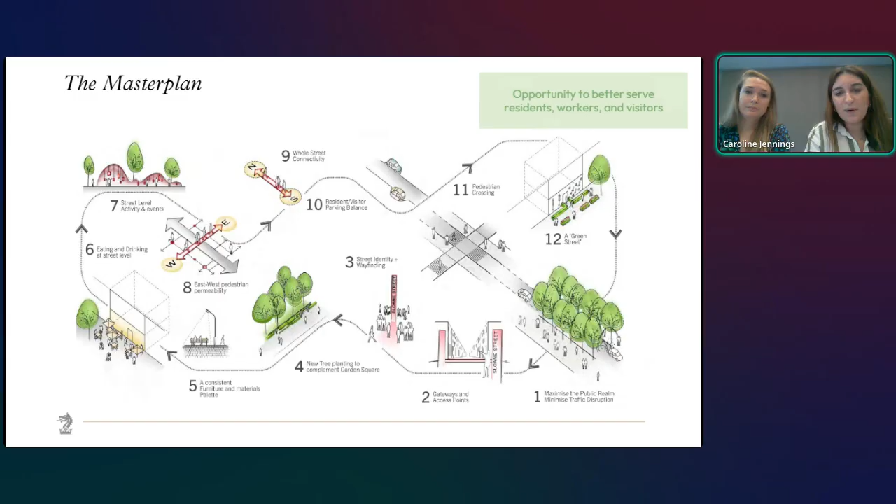One of the key aims of this project was to contribute towards a greener, healthier environment. We worked with sustainability consultants throughout to ensure this was achieved and that its impact was measurable. Biodiversity and sustainability expert GreenGauge carried out a full ecosystem service assessment on the project's completion, which reported a 17% increase in urban greening factor, resulting from the 105 new trees and significant climate-resistant planting at ground level, and a 175% increase in biodiversity net gain, along with a 51% increase in tree cover, which is forecast to grow significantly as the trees mature, resulting in an immediate 33% air pollution removal, which again is forecast to increase to 300% in 30 years' time. Together, these measures reduce urban heat, improve air quality, support biodiversity, and contribute meaningfully to climate resilience in a dense urban setting.

And we just wanted to mention briefly, it's been fantastic to see it inspire the community. We didn't include this in the original award, but we've also collaborated with Louis Vuitton on planting a pocket forest just off Sloane Street with regular volunteers who tend it, and beehives in partnership with Dior, whose staff volunteer every week to inspect and tend to the beehives.

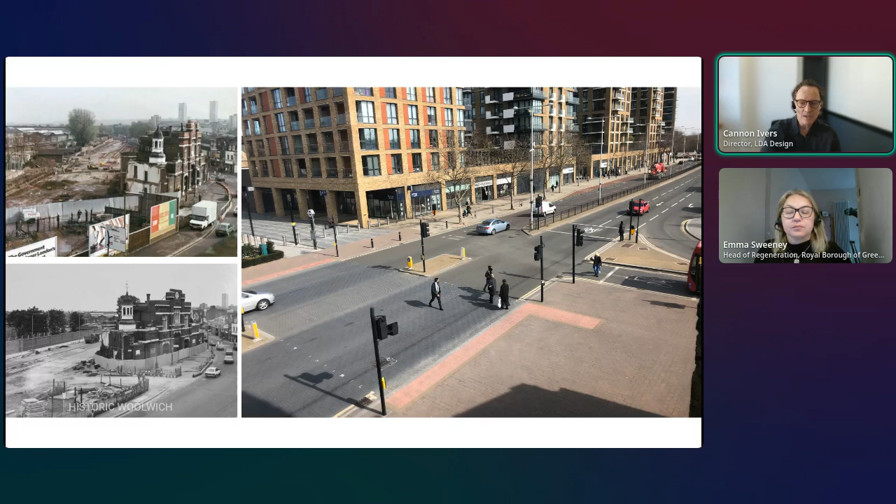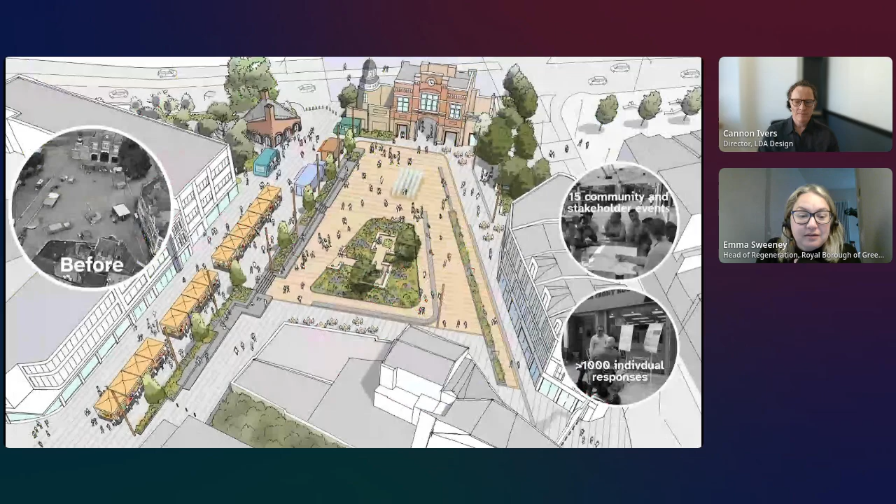Since 2021, we've been working with the local community and stakeholders on the development of the 3 public realm projects shown on this plan. Outreach included 2 public webinars due to COVID and a letter drop to 22,000 residents and businesses. Social media posts reached over 37,000 people and a project website was set up, receiving over 500 comments. We met with accessibility groups, traders and young residents and held 15 community and stakeholder events, gathering over 1,000 responses. In addition to this, we ran dedicated workshops with the market traders to re-establish the linear market.

The site itself was entirely hard paved with a constant slope that limited the functionality of the square, running from left to right across the square. The gates at the gatehouse were closed, preventing a direct pedestrian link to the Elizabeth line, which now is used by 13 million people annually. We reprofiled the site to make it more usable for the day-to-day and for events by reinstating the historic high pavement on the left of this image, where the linear market sits, and added seating terraces to the east.

We reinstated the linear market, and the council delivered the market pavilion in the upper left of this image, and gardens with Studio Weave and Tom Massey. 60% of all the paving was reused on site, and granite blocks from Beresford Square were used on Powis Street and the market pavilion. 58 trees and over 2,000 square meters of planting makes the site 30% greener, with SuDS absorbing surface water and mitigating local flooding.

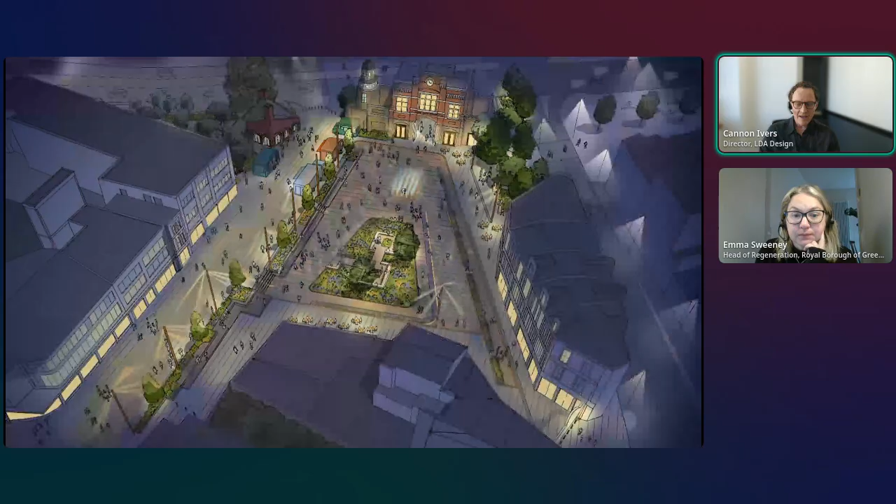The design considers evening and nighttime use, with lighting designers Michael Grubb Studio, ensuring Beresford Square feels welcoming and safe, and the gatehouse is celebrated with elegant lighting. The work by Gort Scott on the Royal Arsenal Gatehouse has restored the Grade 2 listed structure to its former glory, and the gates are now open for the first time in 25 years. This creates a direct physical and visual connection across Plumstead Road between the Elizabeth line and residential areas to the north, and Beresford Square and the town centre to the south.

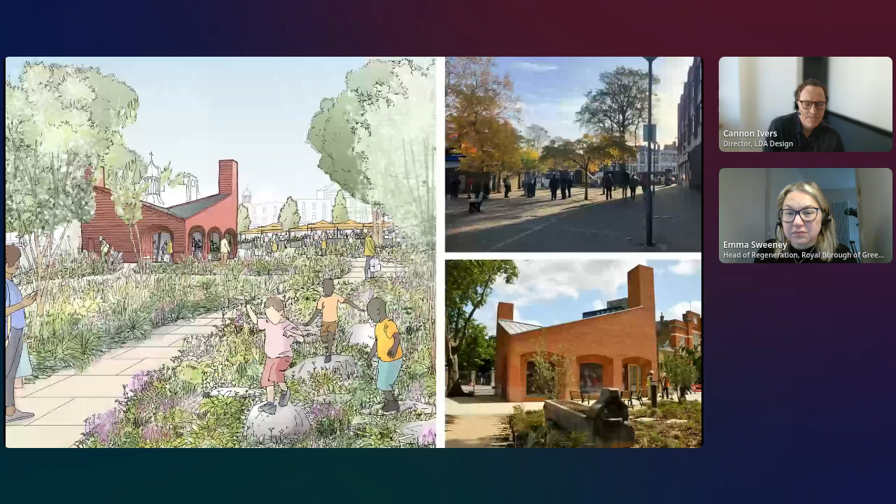Emma, are you on mute?

I'll carry on. The market pavilion and gardens designed by Studio Weave and Tom Massey transformed a poorly designed, underutilized, hard paved area with no seating into a new community space surrounded by nature. The pavilion and gardens have a direct relationship with the gatehouse and Beresford Square, which strengthens and unifies the public realm. The pavilion includes fully accessible public toilets and a new cafe that opens in the spring, which has enabled local business to expand to Woolwich.

The new urban garden provides a different emphasis and experience to complement Beresford Square and provides safe and inviting routes to and from the bus stop. 3 existing 19th century drinking troughs have been reused across the public realm, including one in the gardens as seen in the photo above.

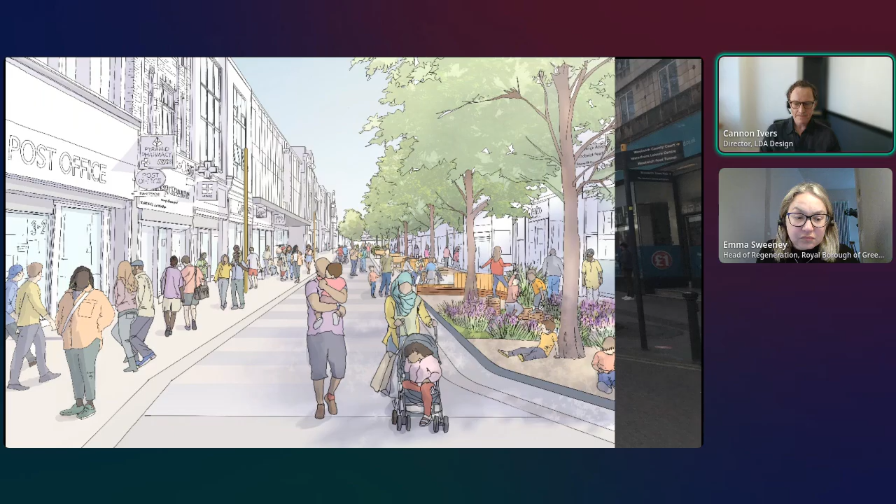Moving on to Powis Street now. As the main high street in Woolwich, Powis Street already had a good structure of existing trees and alternating groups on either side of a clear central service route, active frontages, and a flush, predominantly pedestrian street. The layout, furniture, and materials, however, were dated and didn't function well, with excess street clutter, bollards, and underused seating. Powis Street is crucial to the local economy, providing places to shop and to socialize. Combined with the market at Beresford Square, this is the main shopping hub for the wider area.

So the delivery of Powis Street has transformed the 320-meter long street, removed over 200 bollards and other street clutter, retained existing trees, introduced inclusive and varied seating using reclaimed materials from Beresford Square, and provides playful social platforms for individuals or groups to share in order to increase the dwell time and to improve the overall atmosphere of the local high street. 250 square meters of planting at eye level complements the existing trees, and enhanced lighting makes the street feel more welcoming, safe, and attractive. The new paving brightens the street to make it more inviting.

Future external food and beverage seating areas have been planned into the design to help the council encourage a varied offer alongside an emerging nighttime economy. And finally, the council developed a shopfront design toolkit with Turner Works to develop a strategy to create a consistent identity and build on the Powis Street revitalization.

And to close, the impact of the design and delivery of these projects has significantly elevated the quality of the public realm and local facilities in Woolwich, encouraging dwell time, community cohesion, and civic pride. The projects have been shaped and welcomed by the community with extensive consultation and engagement, celebrate the local history and enhance the heritage of the architecture, introduce 58 trees and over 2,000 square meters of planting, making the site 30% greener with SuDS to absorb surface water and mitigate local flooding, and create generous and varied seating areas, providing all-inclusive access.

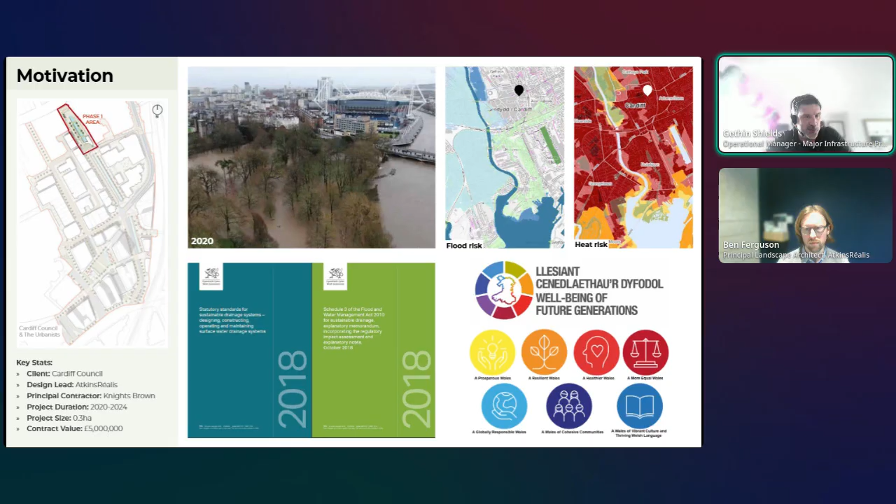So the idea here was to go forward with something that would be a catalyst for that wider redevelopment, a sustainable public realm project that would also take action on things like climate change and provide new spaces and public space for future generations alike. And also with the hope to bring back business and people to a really declined area. And I'll pass you on to Ben now, who's our lead designer, and he'll take you through how, whilst the scheme is a sustainable and regeneration project, it also has a really interesting historical twist to it as well.

Thanks, Gethin. As Gethin was saying, the history of this is a really important factor to the project. As the name suggests, the dock feeder canal was constructed to provide water to the docks, which were built in the mid-19th century. Thanks to the docks, the city became the world's foremost exporter of coal and iron during the latter phases of the Industrial Revolution. This significantly boosted the city's economy and its population.

Sorry, skipped on too many slides.

And that's precisely what we've done, transforming what was a large, uninspiring roadway dominated by vehicles into a multifunctional and multifaceted public space, all delivered for a capital works cost of £5 million. As we've seen in cities like Manchester, where Mancunians have been reunited with the River Medlock and Mayfield Park, this project has reunited Cardiffians with the dock feeder canal, reconnecting people with the city's rich history.

The design went through an iterative process between ourselves at AtkinsRéalis, Cardiff Council, and Cardiff's SuDS approving body, also known as SAB, from 2020 onwards. The project was classified as permitted development, therefore did not need to go through planning. However, it was featured in a number of public consultations and was developed in consultation with a wide range of stakeholders, including local business owners and Natural Resources Wales, to name but a few.

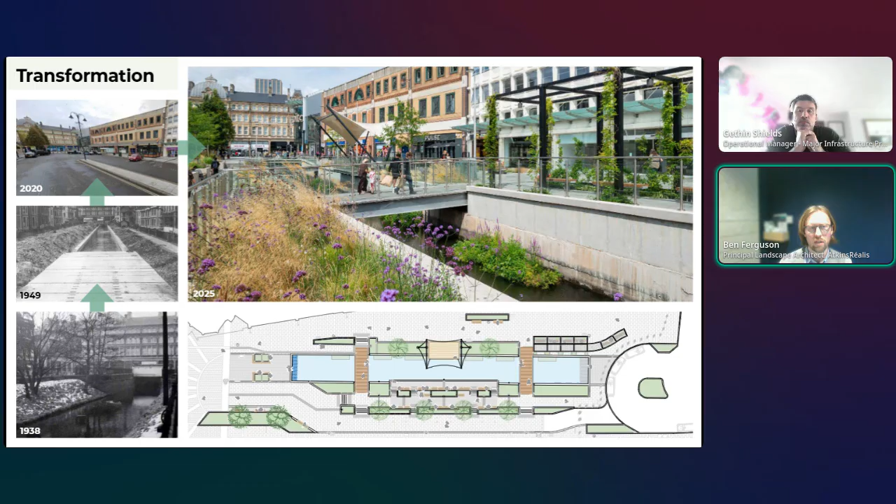The completed design reveals and celebrates a 70-metre stretch of the canal with a generous terrace seating area, 2 footbridges, a stage with a tensile canopy, a waterfall feature, a pergola, architectural lighting, floating wetlands, and a variety of rain gardens planted with trees and biodiverse planting. All of this has been accompanied by a palette of robust materials, as well as innovative recycling opportunities to ensure a lower embodied carbon score.

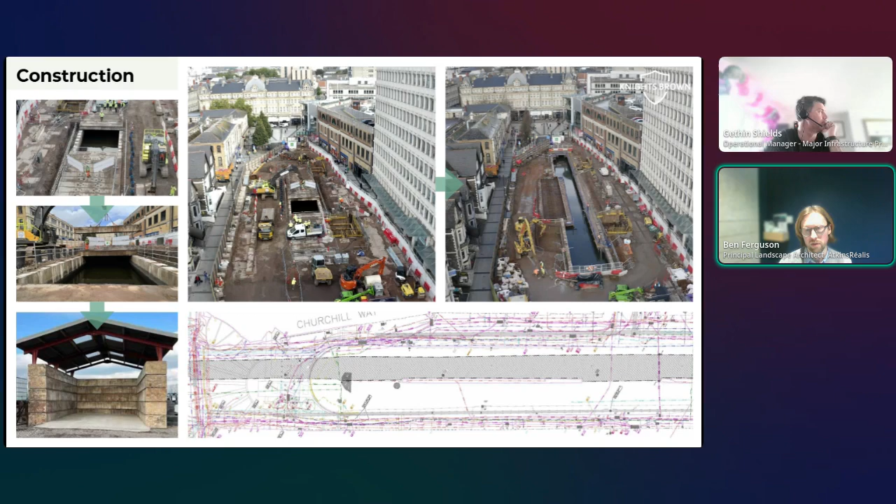The result, it's a unique and inclusive public space that contributes positively to urban life. One of our main aims for this space was to create a place that people would be repeatedly drawn to, a place that would encourage relaxation and connection to others. We did this by introducing a variety of spatial typologies that are known to be beneficial for mental well-being, including places of refuge, prospect, and intrigue.

The entire design of the scheme was also vetted by an inclusivity and accessibility consultant to ensure that the design was welcoming for all. Intimate pathways, inclusive seating, accessibility for wheelchairs, spots for chance encounters, and places to visually engage with the water all add to the positive feel and inherent attractiveness of the space. The waterfall feature at the northern end of the scheme also provides a tranquil sonic soundscape.

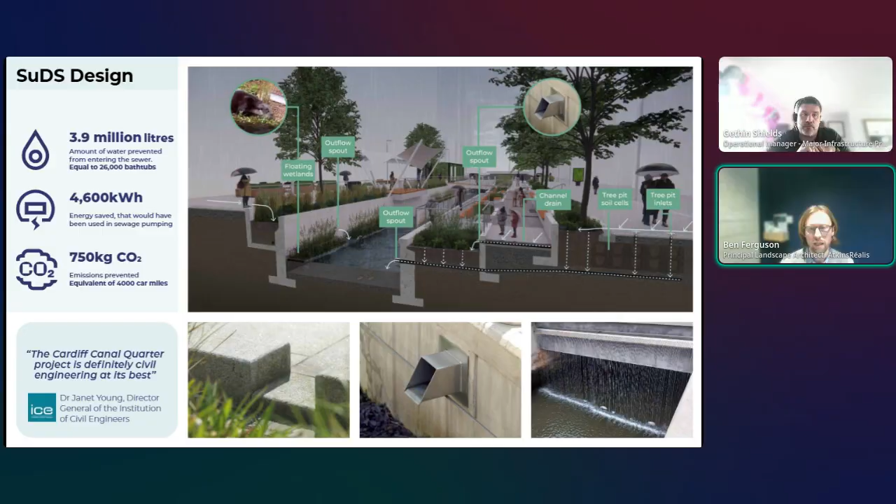Thanks, Ben. So thanks to the benefits that Ben outlined and the result of the project, we've seen real impactful benefit straight away. Whilst we were on site, we had people coming in to our planning department asking about pre-applications and things for vacant units. We had a new pub open called the Dock Feeder Pub. And since then, we've had another pub restaurant open as well. And some of the vacant units have filled up, which is great.

Guys, I'm so sorry to interrupt, but we're running out of time. So I'm going to give you a few seconds to really wrap it up and make sure you've told us what we need to know.

Okay. We've also had the Capital Shopping Centre come forward with a plan to regenerate their shopping centre with a new entertainment venue. People have returned, footfall is up. And I think it's really an example of a project that's had a really immediate impact in an area that needed it as well. And we've also started designing the next phases of this project, and there'll be more news to follow on them in the future, hopefully. So thank you very much.

Perfect, thank you. I'm sorry for interrupting you. I'm going to bring up the judges and ask you some questions. So on the question front, Sarah, you're up first this time.

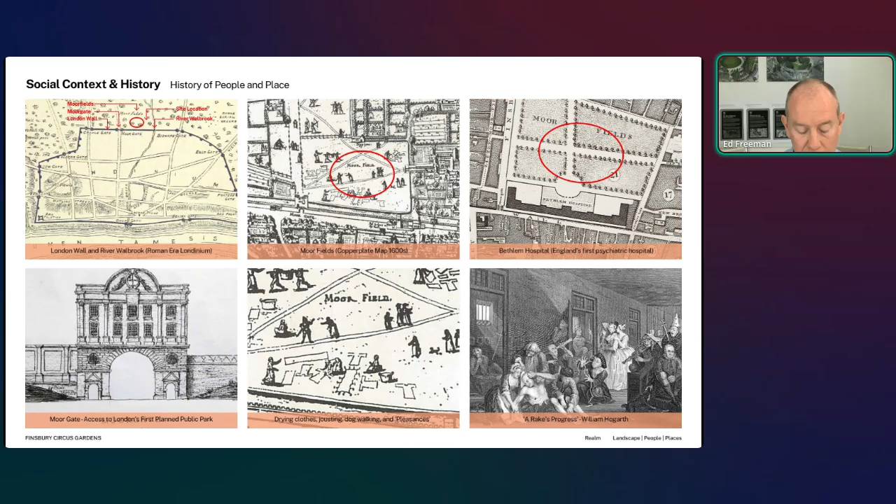In 1815, George Dance the Younger introduced a formal layout, and later in 1873, the Metropolitan Railway was extended from Moorgate to Aldgate using cut and cover construction, leaving a tunnel just 60 centimetres beneath the east end of the lawn, with the Post Office railway tunnel also running below the site.

By the 1960s, the gardens were dominated by a private bowling green and exclusive wine bar. Public access was limited to narrow grass verges, while clipped topiary and ornamental bedding reduced ecological value. Access was further restricted by non-compliant steps, raised lawn edges and hedged barriers. The site links Liverpool Street and Moorgate stations, with footfall data showing 44% entering from the west and 39% from the east, yet movement was confined to a single perimeter path.

Environmental conditions were also challenging. Shaded areas in the west hindered lawn growth, worsened by bird feeding. Overgrown evergreen shrubs created deep shade, limited passive surveillance, and enabled antisocial behaviour. Mature trees required careful design adjustments to protect their roots. The construction of Crossrail's Liverpool Street station, connecting through to Moorgate, closed the gardens from 2010 to 2020, and a temporary lawn replacement created drainage and accessibility issues. The COVID pandemic required remote consultation and design coordination.

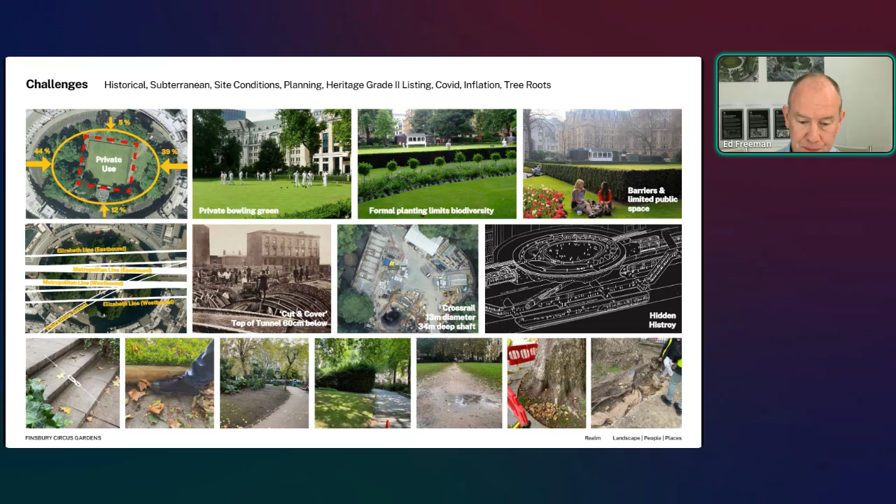The gardens are Grade 2 listed and on Historic England's Register of Parks and Gardens. Extensive research and archaeological investigation were undertaken with MOLA to support planning. Close consultation with Historic England included co-designed dialogue to enhance the setting of a listed fountain. Engagement involved statutory and non-statutory stakeholders, local residents, businesses, political representatives, and community groups such as the Friends of City Gardens. Pop-up garden events enabled direct public feedback, fostering transparency and inclusion, and responses were overwhelmingly positive.

Transport for London were consulted to address loading constraints above the Metropolitan Tunnel, and historical research with the London Archives, the London Picture Archives, and Bethlem Museum of the Mind informed interpretation. Guidance from Apicultural, Pollinating London, and the RHS Perfect for Pollinators initiative shaped biodiversity strategy.

The redesign is grounded in the relationship between people and place, restoring the garden's role as a green civic haven. The master plan is structured around 3 interwoven layers: character and use zones, access and circulation, and biodiversity and habitat creation. Inspired by the concentric oval form of the surrounding circus, the ring of mature plane trees, and the circular historic path, the design introduces distinct character areas: the West Woodland Gardens, which are intimate and sheltered; the East Gardens, which are open and social; the Inner Gardens, which are biodiverse and protected. The Central Lawn is a communal and flexible space.

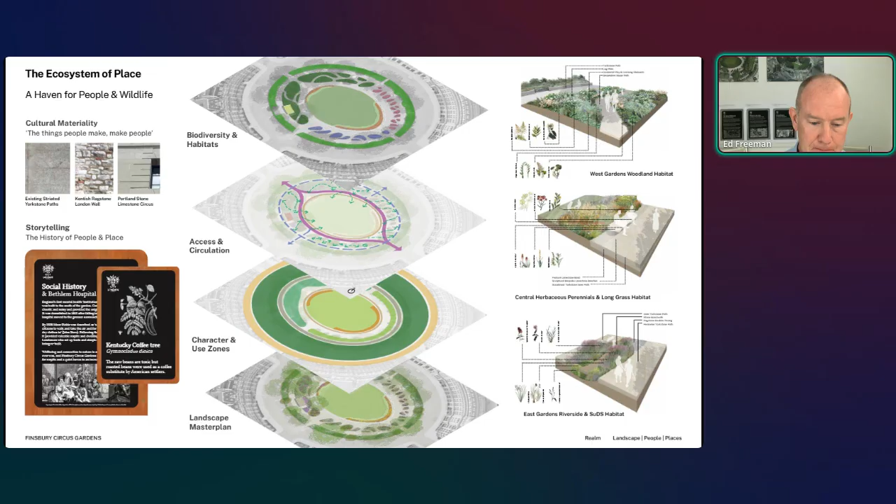Urban green space generates significant economic and social value. In the city, it's estimated to deliver £87 in health and wellbeing benefits for every £1 invested. The scheme introduced 6 new habitats, 12 climate-resilient tree species, and over 13,000 plants and 6,000 bulbs. Over 90% of the paving materials were reused or sourced within the UK.

Seating capacity increased from 220 to 420 seats, responding to peak lunchtime demand. Replacing the private bowling green with a flexible lawn enables hundreds of people to gather in summer. The central lawn can accommodate concerts, outdoor cinema screenings, and civic events. And adjacent hardstanding supports staging, and recessed water and power connections around the perimeter enable pop-up markets and food vendors.

Since reopening, the gardens have been active daily from early morning until dusk. They host meditation and yoga sessions, informal coffee meetings, team lunches, and student gatherings from the nearby Fashion College. Residents also use the space in the evening for relaxation. Throughout the day, it functions as a green corridor linking key destinations within the city. Consistent and varied use demonstrates its value to workers, residents, and visitors alike.

Beneath mature London plane canopies, a woodland habitat has been established. Shade-tolerant shrubs and evergreen species provide year-round structure and seasonal fragrance near entrances and seating. Habitat features include loggeries for stag beetles, bat boxes, and bird nest boxes.

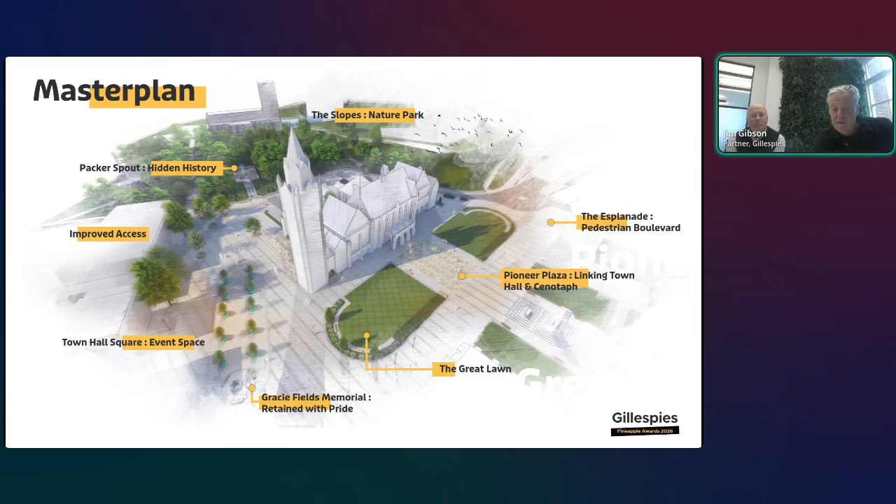Was an area of steep slopes and an area for effectively antisocial behaviour, drug abuse and alcohol abuse. And the challenge in that area was to introduce and reintroduce some of the historic references to this part of the town hall, connect the town hall to the parish church at the top of the slopes there, and basically to improve biodiversity, passive surveillance, and make the area far more accessible and welcoming to the public. So the whole place, as you can see, unsurprisingly, with the town hall as the focus, got an extraordinarily civic feel, and that was very much our obvious intent.

The final aerial shot here just reinforces some of the points that I was making. In the foreground is the cenotaph and the memorial gardens, the Great Lawn, framing the main facade of the town hall. To the left of the view is the flexible space for outdoor events and performances. We'll touch on that later in the presentation. And on the area behind, you can see the slopes, which was a Heritage Lottery funded initiative, connecting the town hall to the parish church at the top of the hill there.

I'll then move the slide forward. Warren's going to now step in and discuss some of the more detailed aspects of the design. Thanks, Jim. Yes, so I'm just going to cover in a bit more detail some of the main elements of the intervention around the town hall, just to add a bit more background and context to them. So up on the screen there now, we're looking at the lawns.

Jim touched on the fact that this was an area of car park before, and when we started working the project, there seemed to be an assumption that we would just replace the car park with a paved space. So early doors, we challenged that in terms of can we bring greenery into this space? Can we bring a formal lawn that links with the other formal lawns? Because actually, I don't know if any of you have been to Rochdale, but it's got a great pride in civic horticulture. They have a great team of people there who look after this type of thing.

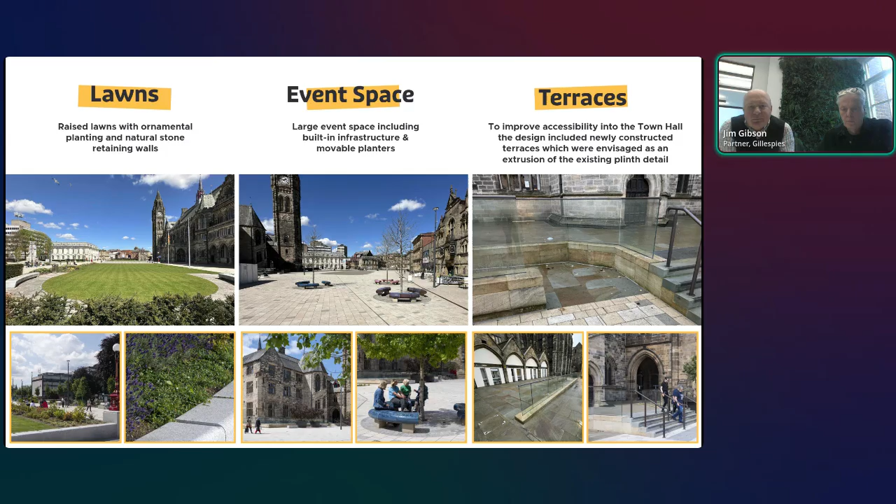So there's a lot of clearance done, and now our focus was to really unlock the story of this space, because we know that it's quite instrumental in the start of Rochdale as a township. And we were very focused initially on the type of planting, because the planting elsewhere we've done was quite ornamental. So we thought this was the space for more nature-based planting, because actually there were some vestiges of really early groupings of wildflowers here that we were retaining and building upon. So it was quite a nice approach that's been led by natural planting species.

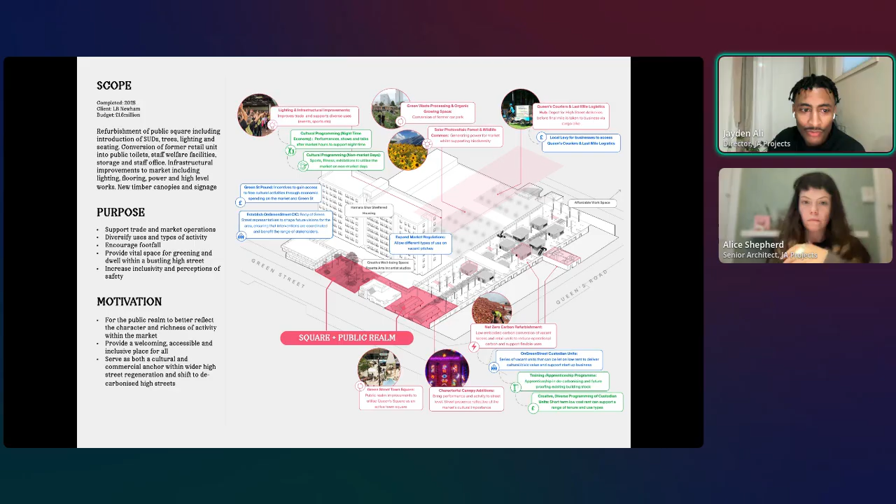The purpose was to safeguard the future of the market while increasing footfall and diversity of use, creating a welcoming civic anchor, supporting inclusive growth and a resilient low-carbon high street.

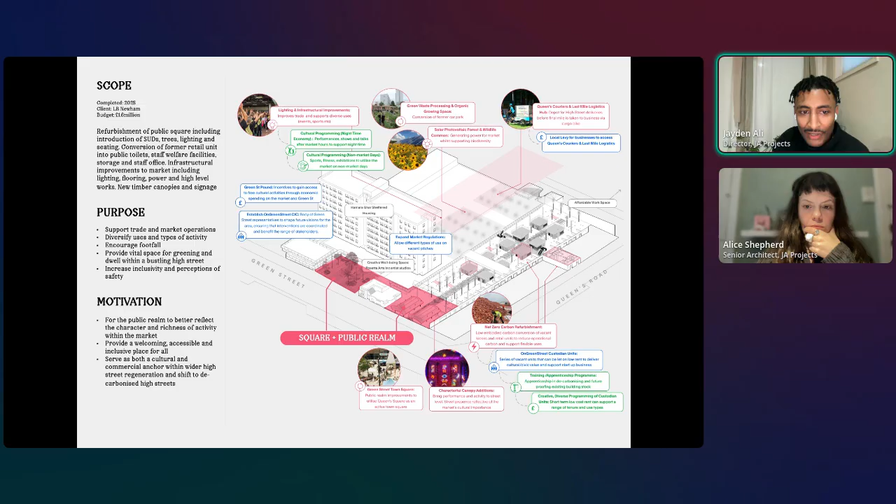I would say that the community participation is one of the real big innovations in this project, and it shaped the project through a bespoke co-design program, which we call Talking Shop. Rather than formal consultation, engagement took place within the everyday market life itself. We held a market stall, for example. We served like 2,000 cups of chai. Shared meals, temporary installations, informal conversations were all part of that strategy.

Uniquely, we led a community steering group that co-designed the co-design. I can say more about that if you're interested afterwards, but I think it's super unique. They shaped these activities that were designed to reach voices often excluded from planning processes, including women, young people, and traders, and we communicated in multiple languages. For example, we composed a team that could speak both Hindi and Gujarati.

Activities required no specialist knowledge. Food became a shared medium for discussion, enabling people who might not normally share a table to exchange ideas openly. Participants tested layouts, activities, future uses, directly informing the design of seating, lighting, and programming infrastructure. And this process started to ensure that the space evolved from collective knowledge, building trust and enabling the long-term stewardship, which is so vital to the success and growth of its community.

Inclusivity shaped every design decision, recognizing that public spaces must work for people with different identities, needs, and experiences. We took a really intersectional approach, guiding improvements to accessibility, safety, and comfort. Lighting strategies improve visibility and perceptions of safety, responding directly to concerns raised by women and girls. Step-free routes and generous circulation supported mobility for all users, while accessible toilets extended inclusivity beyond minimum compliance.

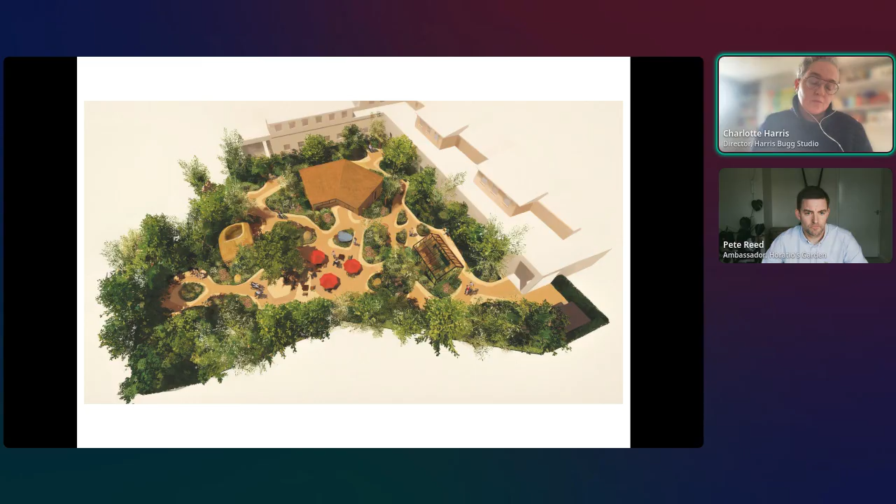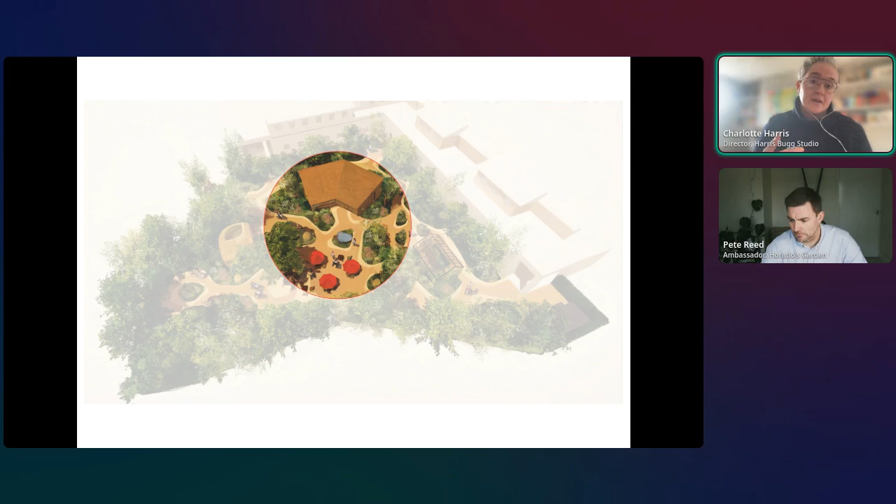Firstly, this is the Glade. It forms the social heart of the garden. This is a social building, a space for rehabilitation, gatherings, informal interactions, craft classes, barbecues, music, and last year was pretty much a constant sports hub with England doing so well. And that was pretty incredible. The charity talk a lot about how hard it is to get young men out into the garden, and that really created quite a buzz.

This is the area, the Woodland Retreat, a slightly different character. So it offers enclosure and quiet, featuring that pod that Pete mentioned. You can just about see the form of it there, almost leaf form. And what we did was we tested whether beds could turn in that comfortably within it. And just allowing solo time. So that's used for things like calling your solicitor, hanging out with your family, having your nails done, all those things that perhaps you don't get privacy on the ward for.

And this corner is called the Forager's Dell. It centres on a glasshouse we designed as accessible. There are movable planters. They're designed for the practical requirements of use by wheelchair users, edible planting. And this really does support a lot of occupational therapy, seed planting, cuttings, potting up, that sort of thing.

And in this garden, everyone involved really has left their mark, whether patients, nurses, doctors, contractors, plants people, fabricators. We took thumbprints in clay, like Sheffield's cutlery hallmarks, and we set them within the pod to give this visible record of shared ownership, shared community, and shared voices. And we also designed for life beyond handover, talking about community. There's a paid head gardener who leads year-round care with local volunteers supporting patients and day-to-day tending. So the garden very much deepens rather than fades.